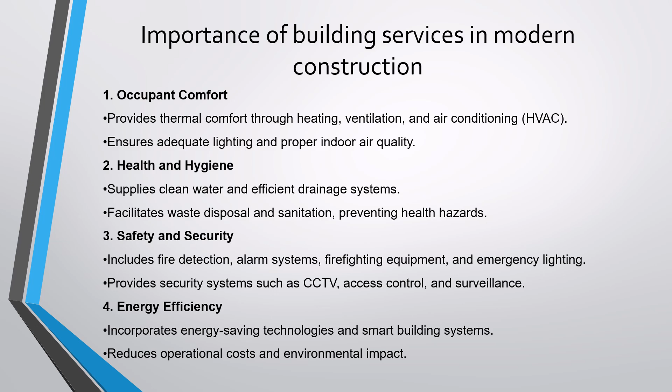Next is about energy efficiency, that is using energy saving technologies, adopting the concept of smart building systems, so thereby we can reduce the operational cost and also the environmental impact.

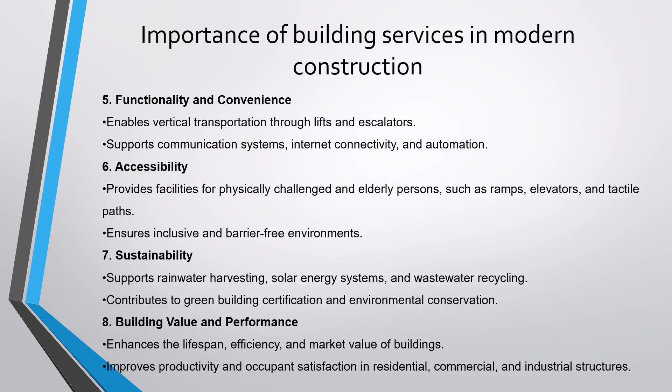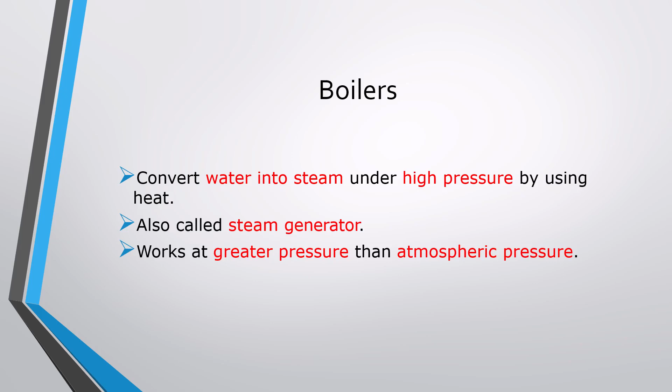Next, we have boilers. A boiler converts water into steam under high pressure by using heat - that's the simple explanation. It is also called a steam generator, as it produces steam by converting water into steam, and it always works under pressure greater than atmospheric pressure.

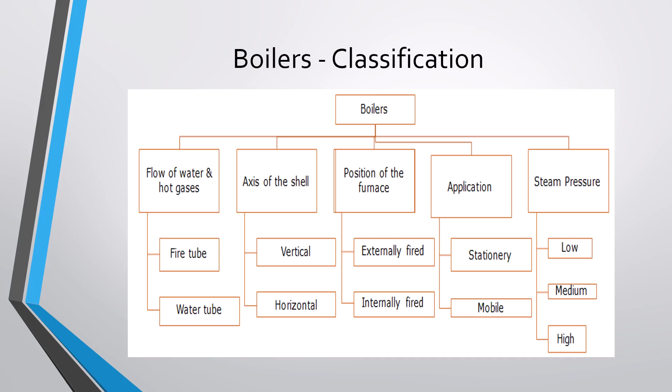In this, we are going to see in detail about two types of boilers: one is the fire tube boiler and the water tube boiler.

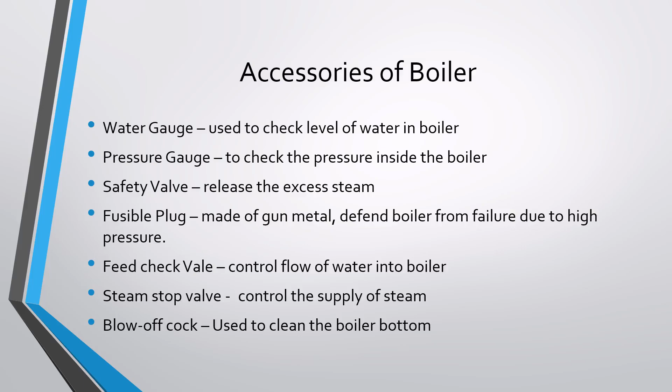The feed check valve is to control the flow of water into the boiler. The steam stop valve is to control the supply of steam, and the blow off cock is to clean the bottom of the boiler. These are the common accessories of the boiler.

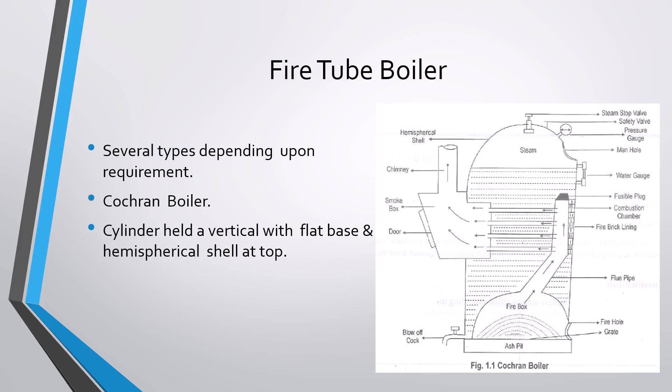Moving on to the fire tube boiler, it is named the Cochran boiler, which is of cylindrical shape with a vertical cylinder held in a vertical position, with a flat base and a hemispherical shell at the top.

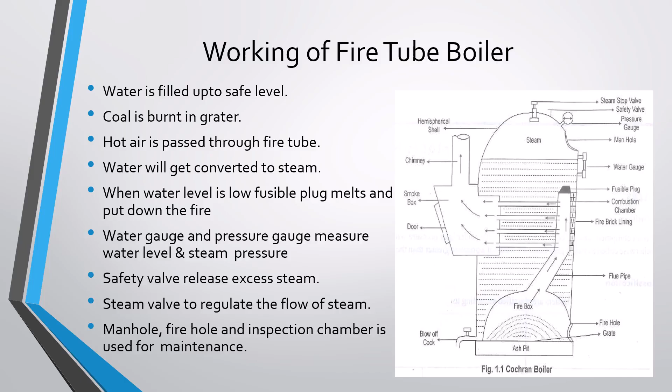Water is filled up to the safe level, coal is burnt in the grate, and hot air is passed through the fire tube, converting water into steam. This is the working of the fire tube boiler.

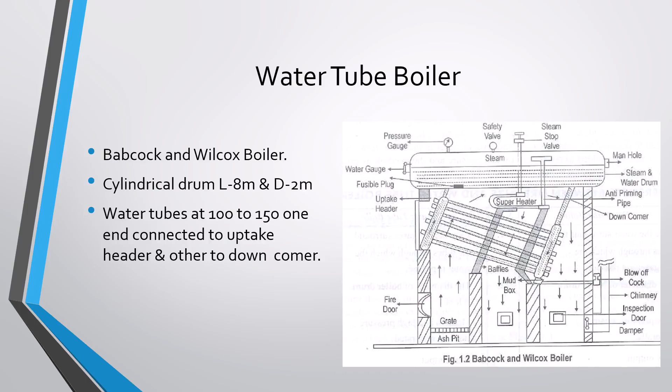It is a simple cylindrical drum usually of length 8 meters and diameter 2 meters. The water tubes number about 100 to 150, with one end connected to the uptake header and the other end towards the downtake header. This is the working of the water tube boiler.

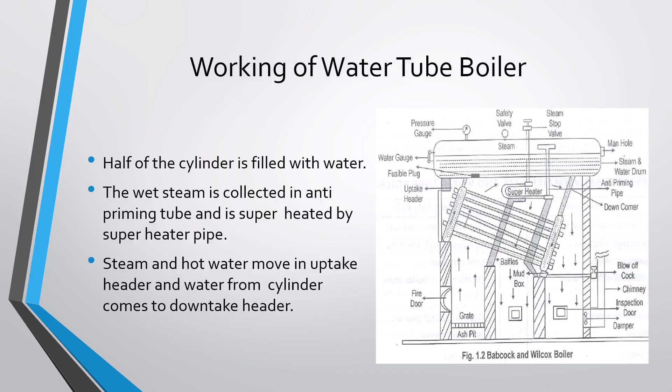The water is filled inside, heat is passed, and the water is converted into steam. Next is about the high pressure boiler, known as the Lamont boiler.

It generates very high pressure of above 85 kgf per centimeter square - kgf being kilogram force. Usually in modern power plants they use this type of boiler in order to create greater pressure.

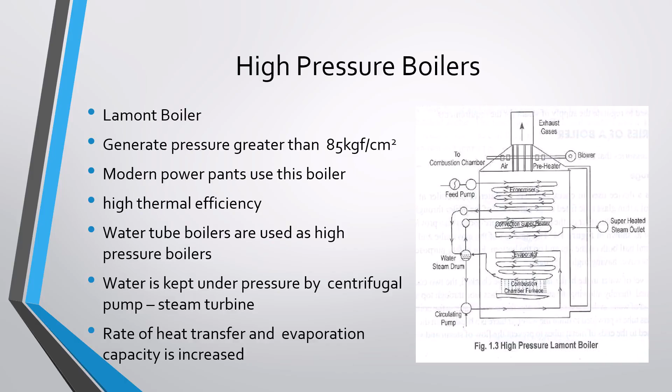These are the workings of the high pressure boiler. The water is fed into it, and preheating methods are used to convert the water into steam.